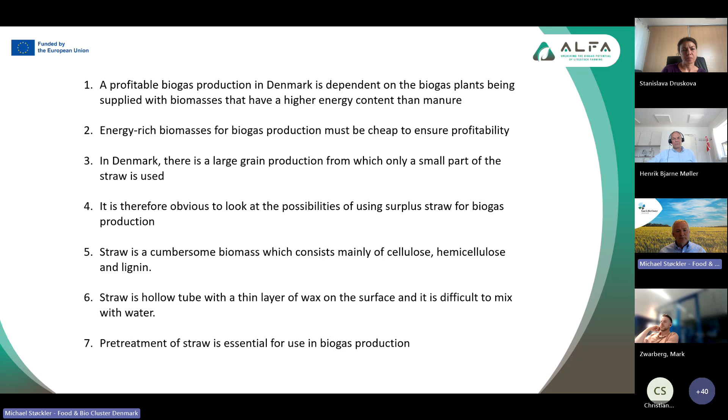Straw is a cumbersome biomass. It contains mainly cellulose, hemicellulose, and lignin. On top of that, the surface is covered with a thin layer of wax, which means it's quite difficult to have it suspended in water. It tends to float, and that's why pre-treatment of straw is essential to use it for biogas production.

Then a wide range of technologies has been tested to find reliable solutions, and that could be pre-treatment, meaning treating the straw before it's put into the primary digester. It could be inline separation of the partly degassed biomass and then injection of the fiber fraction back into the bioreactor, or it could be post-processing of some of the fiber fractions.

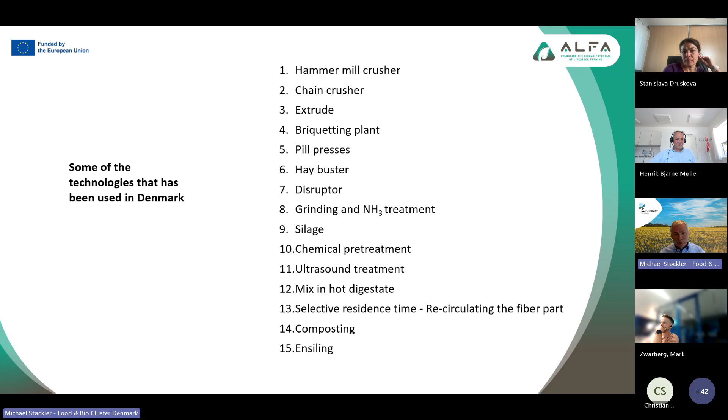Some of the technologies that have been used in Denmark for several years: a long list here with 15 different technologies - hammer mill crusher, chain crusher, extruders, briquettes, pill press, hay busters, disruptors, grinding, silage, chemical pretreatment, ultrasound treatment, mixing in hot digestate, selective residence time, recirculation of the fiber fraction, composting, and ensilage.

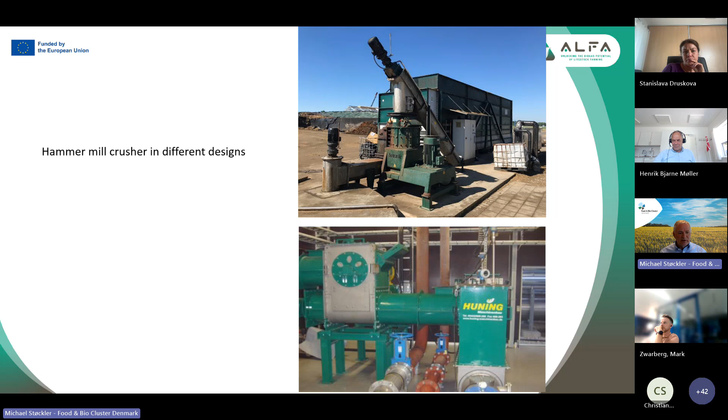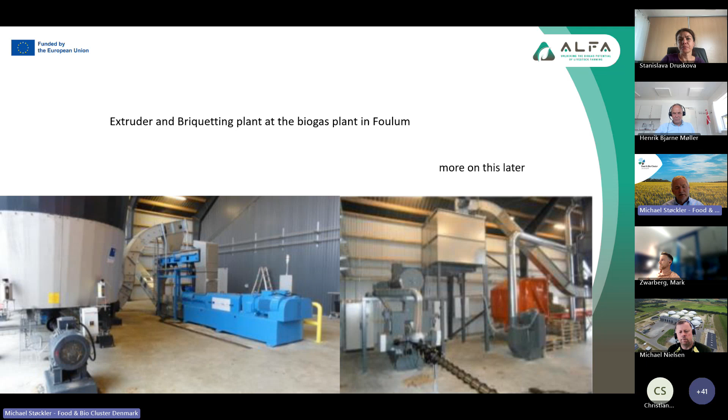Then I'll show some pictures. Take this first: hammer mills have been widely used in different designs and by different manufacturers. Then we have had some extruders and briquetting machines, especially at the plant where Henrik is, which has tested a lot of these machineries. More of this will come later on.

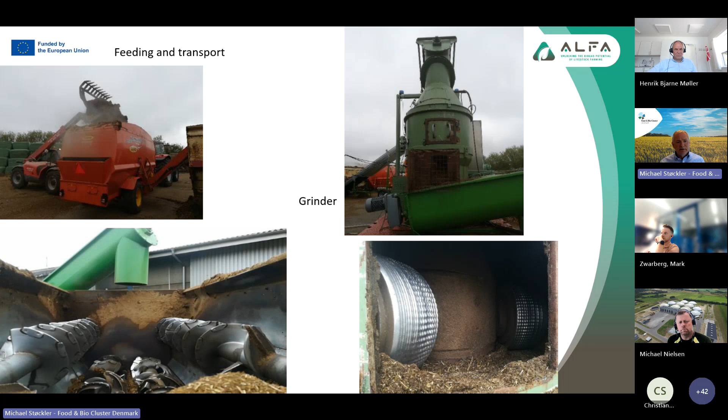We have had special transport equipment. We have had a grinder machine crushing and pressing the straw into pellets.

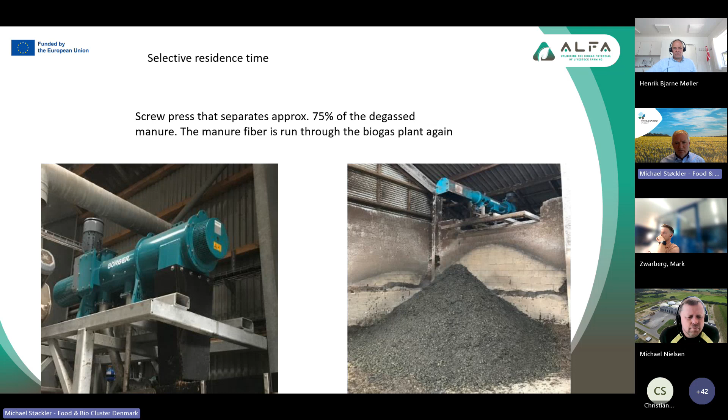We have also had this concept of selective residence time, where you separate part of the biomass from the digester and recirculate the fiber fraction back to the biogas plant for further degassing or decomposing of the fiber fraction, meaning you separate the residence time for different parts of the manure.

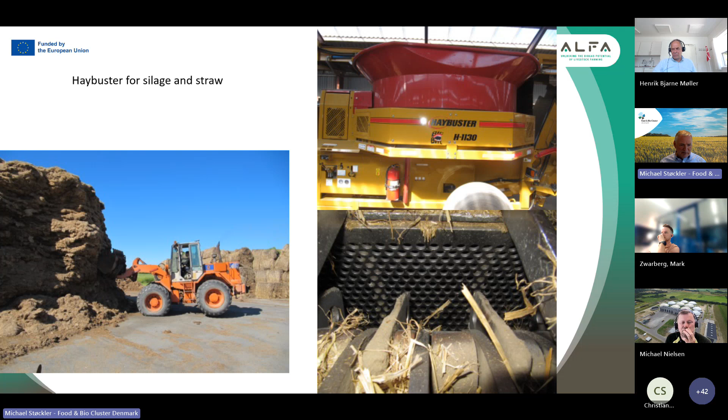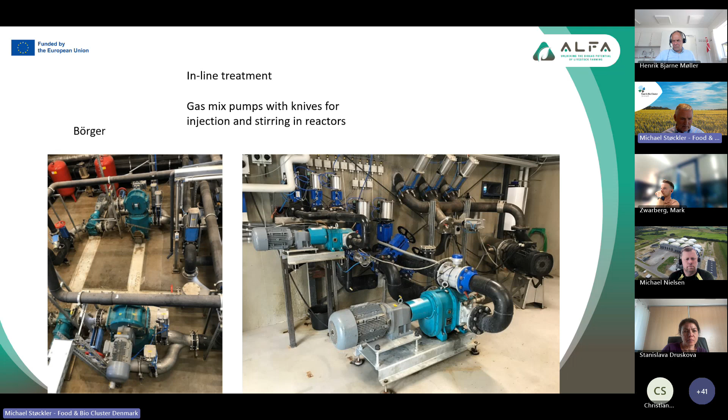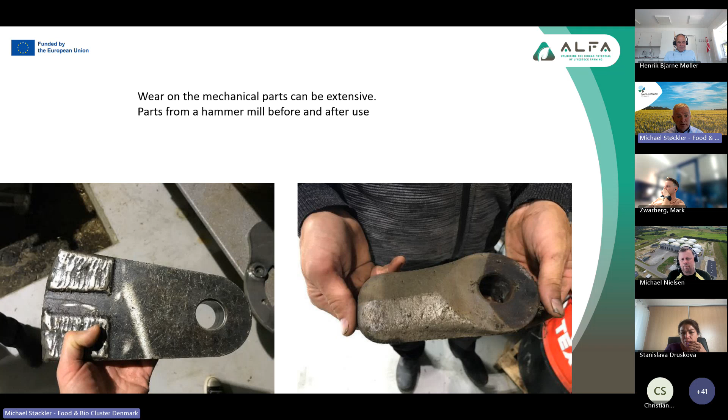But all these mechanical devices suffer from mechanical wear. It's very hard material, and these two pictures show - on the left side one of the hammers from a hammer mill, and on the right side the same hammer after it's been used for a while. So you see the wear of these iron parts is very heavy.

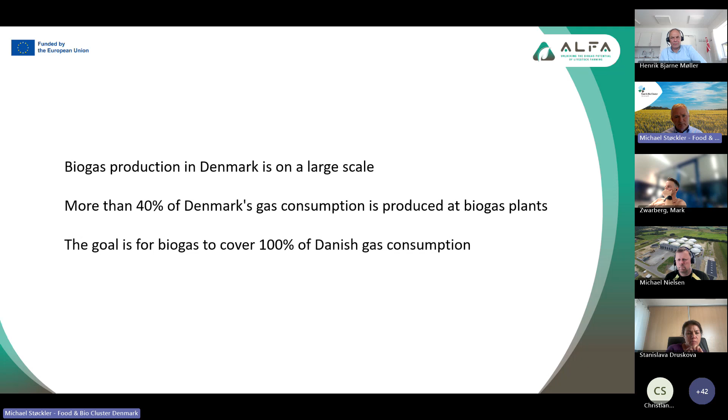Biogas production in Denmark is on a large scale compared to most other places. More than 40% of Danish gas consumption comes from biogas plants. The goal is to have the ability to produce 100% of Danish gas consumption, and that's the end goal for the biogas sector in Denmark.

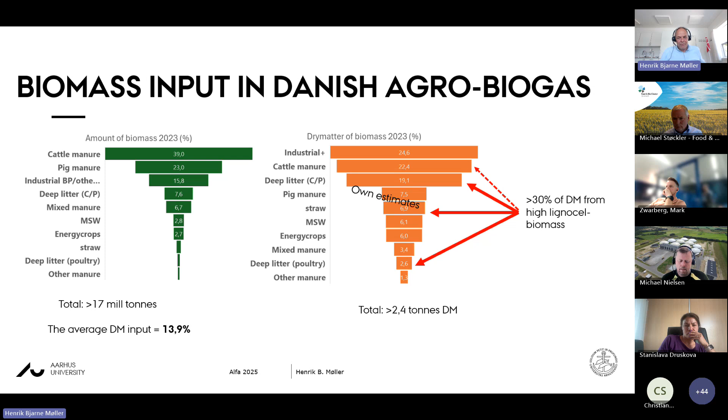When we look at the biogas plants treating straw in Denmark, a lot of plants have some amount of straw treatment. Probably around 40 of the 100 plants today treat some amount of straw, but a lot of them treat very low amounts, less than 10,000 tons per year. Only a few plants are in the high league of treating straw, with up to 40,000 tons. So it's still a rather small amount of straw, even for the biggest plants.

So how much straw do we actually have available for the biogas plants? We have around 6 million tons, almost 6 million tons of straw in total, whereas most is from cereal and a little from rapeseed straw. And today we use it mainly for incineration, feed, and litter.

But this means that there's still a lot of available straw in Denmark. More than 2 million tons of straw is available for biogas. Probably not all of it would be available in practice, but there will be quite some.

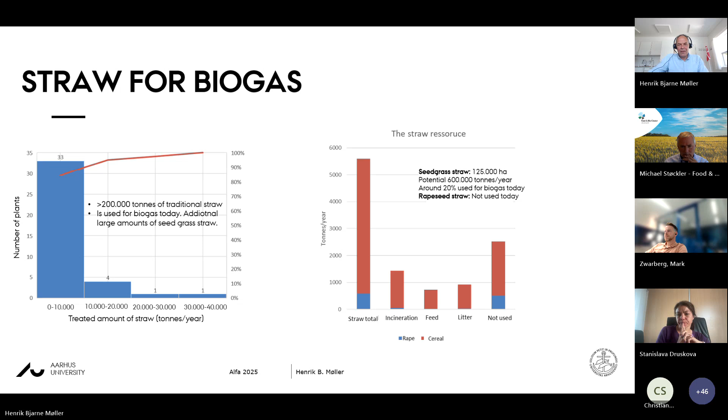Then when we look at straw, how much energy do we actually get out from it? That can be calculated in a lot of different ways. If we know the chemical composition, we can find out that from an average straw, we are somewhere between 450 and 600 liters of methane per kilo volatile solid.

We can also put it in a bomb calorimeter and measure the energy content by incineration. And here we reach about 550 liters methane per kilo volatile solid.

So we have a really high potential, but in real life it is bacteria who's doing the conversion. And when we have done a lot of experiments in batch assays, we are in the range between 210 and 300 liters methane per kilo volatile solid. And you can see here the big variation in different experiments.

So straw is highly variable in how much gas we can get, but in all cases we are only around 60% of the potential. So there's a huge potential if we could increase this amount.

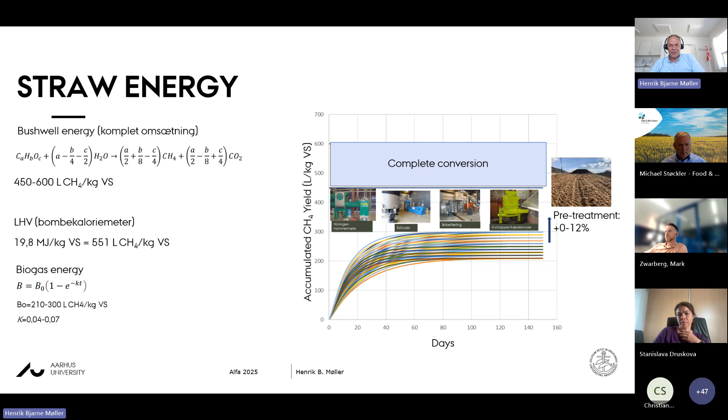And Michael very well described all the technologies that have been used until now, and here we can get somewhere up to 12% extra gas from the straw by, for example, briquetting or extruding or hammer milling and so on. But still, in the pretreatment, there is a high potential that cannot be used today.

The way the straw in Denmark is used today is variable. We have a very big amount of straw now going via deep litter into the biogas sector, and a lot of biogas plants treat this deep litter. Then we have low quality straw.

This is used to a high extent by different actors, and here ensiling and maceration are the main treatments used, and a few plants have more than 10% straw in the biogas mix. That's around 2 plants in Denmark have more than 10% straw.

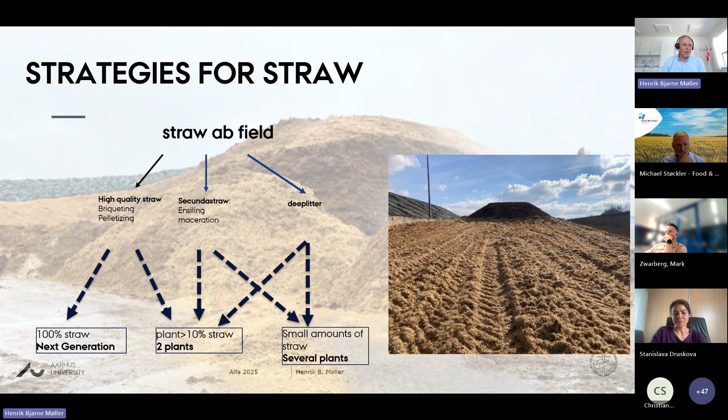Then we have the high quality straw, and it can of course also be used for ensiling and so on, but also it can be used for briquetting and pelletizing and other technologies with dry straw. And there I'll tell a little about the new types of biogas plants that we also have some cooperation with companies to test, where we use 100% straw.

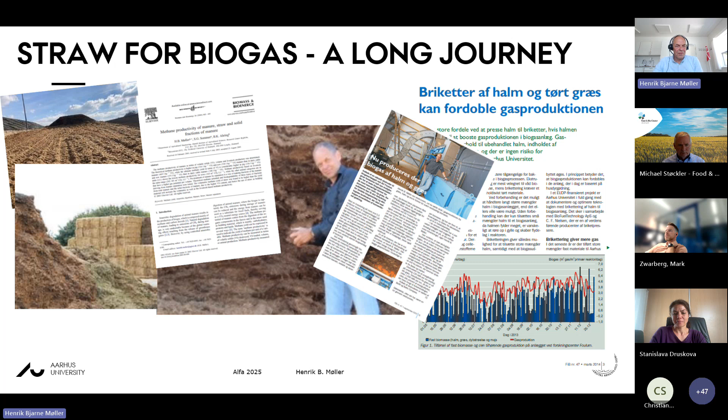But it has been a long journey to reach where we are today. More than 20 years have gone since the first initiative was there, and today it's still, as you saw on the figures, quite a limited amount of the potential that we are using. But to reach the ambitious goal of being completely fossil-free and natural gas-free, straw is the most important biomass to get into the sector.

Then I'll try to highlight a few examples on how to treat straw. We have had a project for several years where we are looking at baling and ensiling.

And the good thing about ensiling is that we can use low quality straw. We can even take the straw directly from the field before it's dry. So in the very busy periods of autumn, where the farmers need to seed new crops, it can be a way to get it away from the fields very, very fast.

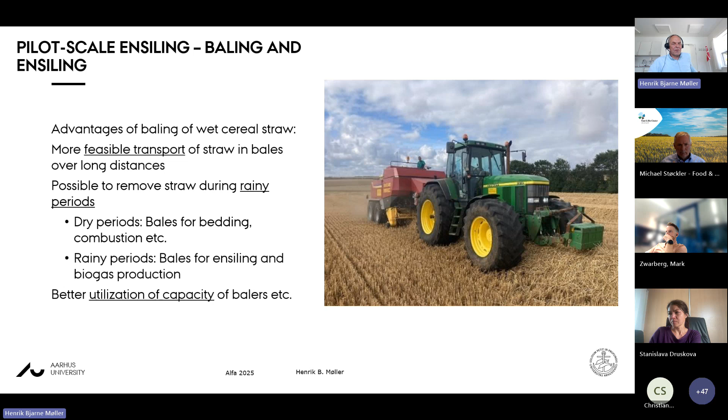And if the biogas plants accept this rather wet straw, there can probably also be a discount for the biogas sector to buy it at a lower quality.

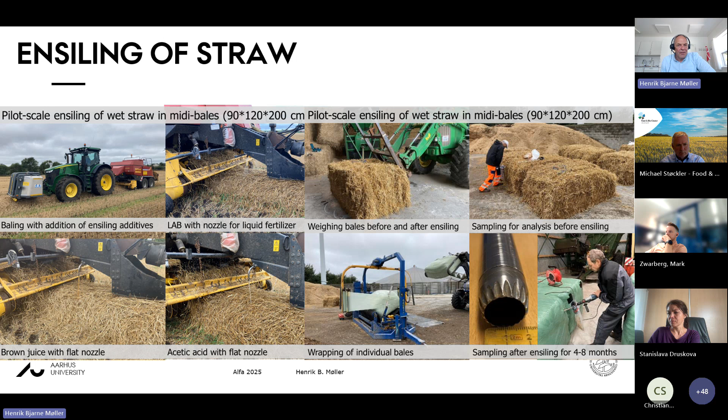During the last year, we have done a lot of experiments with this straw silage, where we have used a lot of different additives and so on. We have added the additives directly in the field, where we have sprayed different additives directly on the straw before baling. Things like acetic acid and enzymes and so on, to reach a higher gas yield.

So this is some of the straw types and so on we have looked at, and some of the additives. And the conclusion is that all these kinds of additives, that we used a lot of effort testing, only have a minor impact.

So what really means something to increase the yield of straw by the silage process is the water content. If we go up in water content, we can get around up to 19% extra gas compared to dry straw.

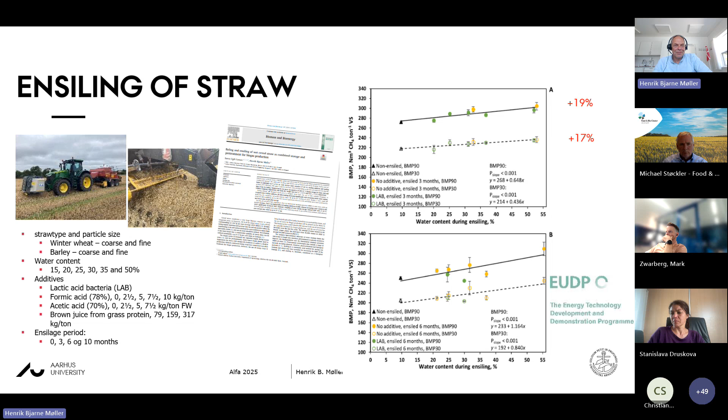That's actually quite promising, but a little surprising that all these additives didn't have a real impact. The reason we get this higher yield by ensiling is the pH decrease during the silage process. As you can see, if we have around 30% water in straw, we can get a proper silage process without any additives.

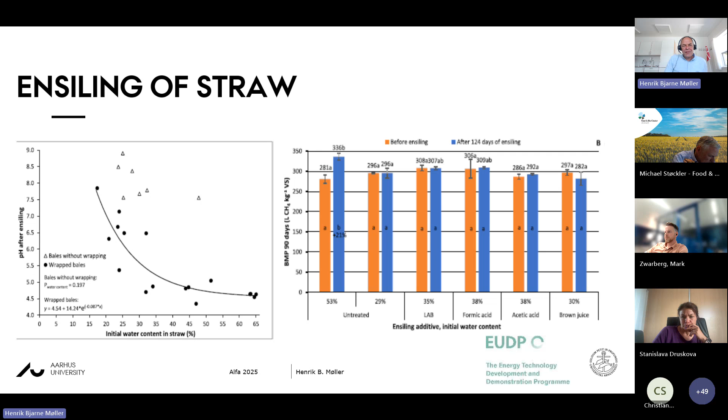We don't need to have any easy degradable sugar or anything, it will happen by itself. As you can see here with the different additives, they don't really have an impact. It is the water content that really matters.

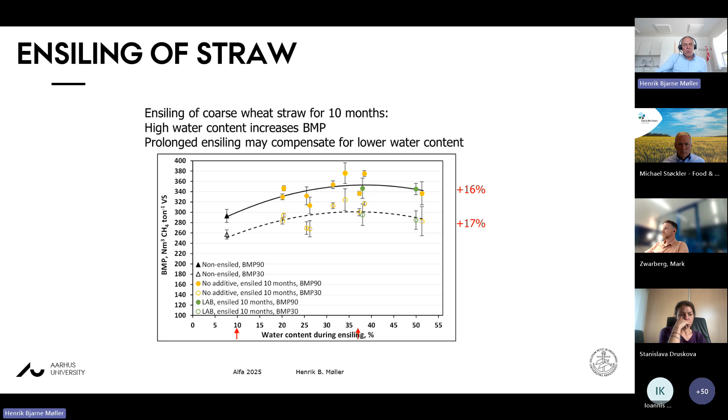Again here you can see wheat straw that has been ensiled for 10 months. It seems there's a positive impact up to around 35% water. Around 40% water, then we have a very good silage process. Going above 40% water, it doesn't seem to have any impact.

As I told you, we also have this new project here with pure straw, where we're also working with temperature. Traditionally, we have mainly worked with mesophilic or thermophilic processes. But we also have microorganisms that actually work even faster than thermophilic if we can increase it to end of 60s, like around 70 degrees.

Something is happening with straw when we go to higher temperature, and we have seen examples of up to 40% in some cases extra gas. This is an example of the setup that we are testing now in Foulum together with Biofuel Technology and Aalborg University in an EUDP project.

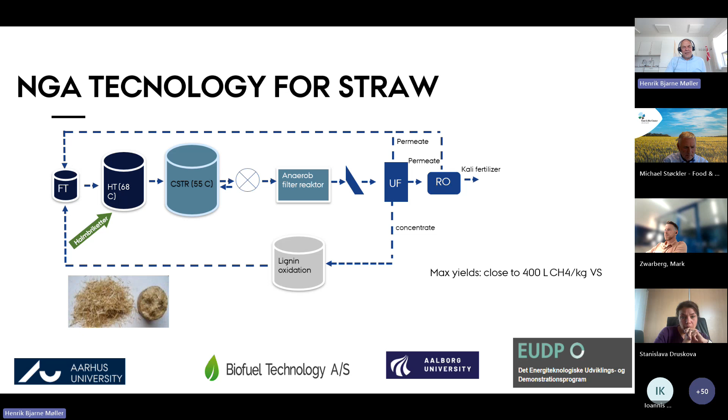We have seen some, in periods, very promising results with around 400 liters of methane per kilo volatile solid in some periods. So it seems that there's something here that really can boost the amount of gas we can get out of straw. There's not time to really go into detail with this, but it is a process where we have a pre-process at 68 degrees and then a normal thermophilic process, with some filtration on the backside and so on, and ideally some lignin oxidation in the future.

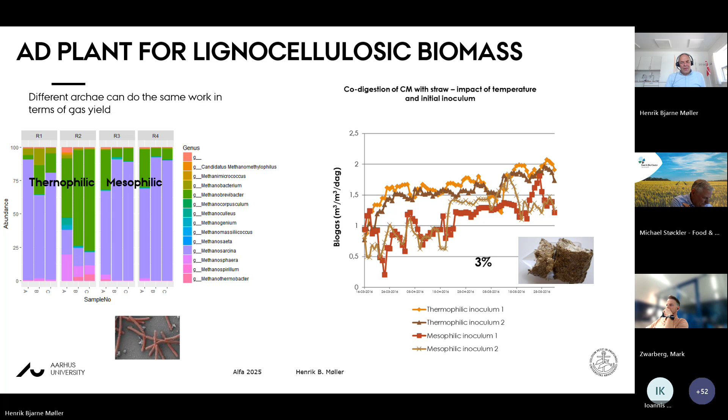Time is running quite fast. Also, one thing that is the Achilles heel of using straw - we think we have solved a lot of problems, but one problem when we look at sustainability is that from 2016 to 2025, we have increased the dry matter from around 5.5% in our digesters to 8.5% on average.

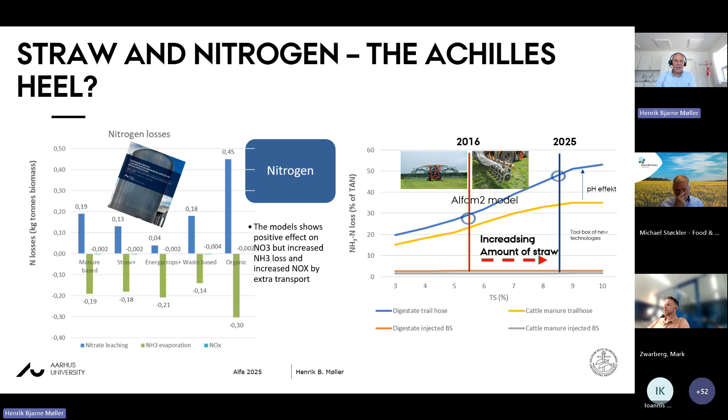We have developed this at AU, this ALFAM2 model, which indicates how much ammonia emissions we will have in the field. This blue one here is digestate, and as you can see, if we go from 5.5% dry matter to 8.5% dry matter, we will go from around 30% ammonia emission to 50% ammonia emissions of the total ammonia we have in the digestate. So it's a tremendous challenge we have here. The yellow one here is cattle manure, and you can see with the same dry matter, but here because of the higher pH combined with the high dry matter, we have a real issue here.

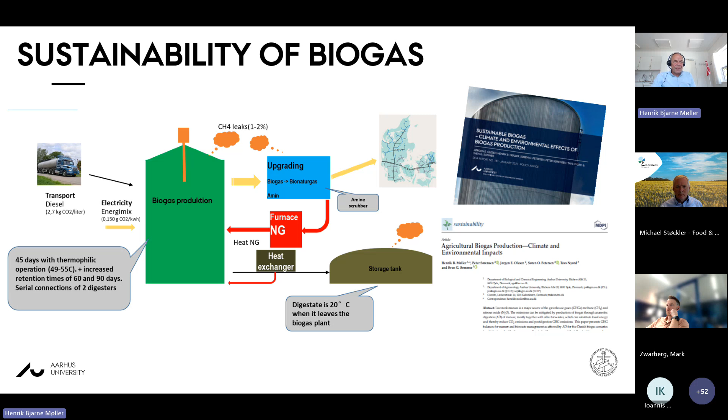Looking at sustainability, we have some challenges here. We have done a sustainability analysis of different biomasses going into biogas plants, published scientifically and also in a report from Aarhus University not long ago. There's not time to go into details, so you can read the reports and scientific publications yourself. The main thing is we looked at 5 different biomass compositions.

We have a quite manure-based system and a very straw-based system, and we looked at kilo CO2 equivalents per ton. On the positive side, we have the gas to the grid, which counts most. Besides that, we also have reduced methane during storage, especially from manure-based plants. But with straw-based plants, we have a much higher energy yield per ton of material, so we have very good sustainability with straw.

I also did a calculation with next generation straw, where we only use straw, which has a really high CO2 impact because of the very high energy density in the straw. If we take CCS, carbon capture storage, into account, we can really have a high CO2 impact, especially for straw, where quite a high amount of the carbon is converted to CO2. We have only around 50% methane from straw conversion, so we have a very high additional effect of carbon capture storage.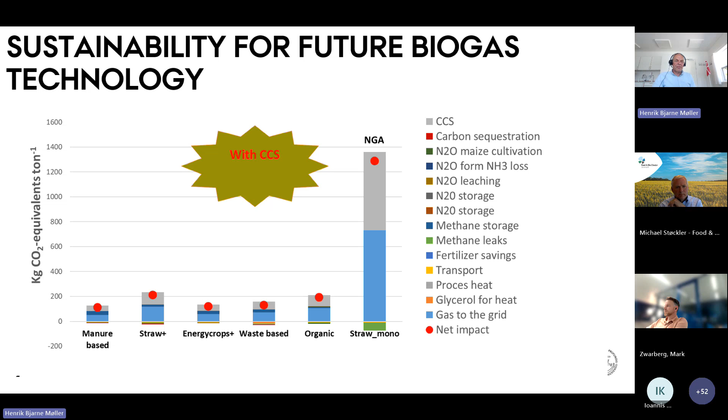I'll come to the conclusion now and say that straw plays an extremely important role for the further development of the Danish biogas sector. Today, if we include the deep litter, around 20% of the gas yield already comes from straw and straw-rich products in the Danish biogas sector, and that is going to increase dramatically if we have to reach the national goal.

There's a huge potential to increase the yield from straw, where we only today get around 50 to 60% of the yield. Also, these new generation straw plants with monodigestion and a very high amount of straw can achieve a very high greenhouse gas reduction. We have some challenges with the fertilizer products which we need to solve.

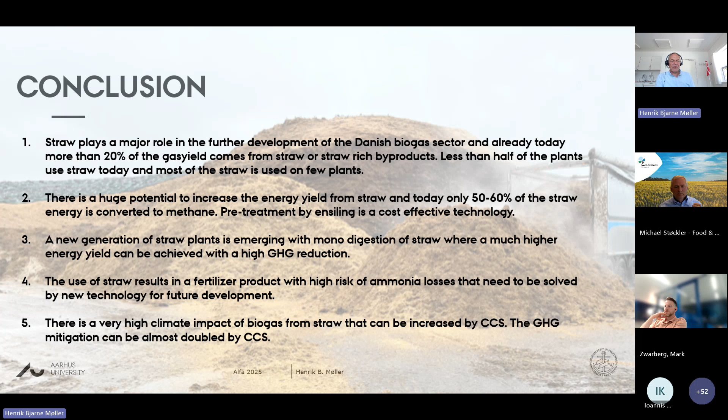And also for straw, it's important that we are able to include the CCS value because of this very high amount of CO2 we have from the biogas from the straw also. So I will end my presentation here, and thanks for your attention.

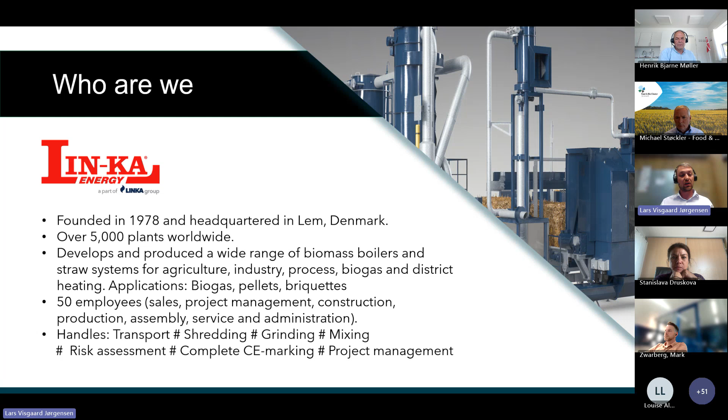First of all, I will talk a little about Linka. We are founded in 1978, and our headquarters is in Lem in Denmark. Worldwide, we have around 5,000 plants. Our first and main focus was making combustion plants for district heating and for industries, farmers, and so on. It has been our focus to burn straw, but now our main focus with straw is putting it into the biogas sector instead. We are 50 employees today in Lem.

Then the next step is our conveyor belt, which moves the straw bales to our shredder. Before it reaches the shredder, we take all the strings off. The strings are placed in a container beside the string remover, and then it's moved to the shredder. The shredder just takes the bales apart.

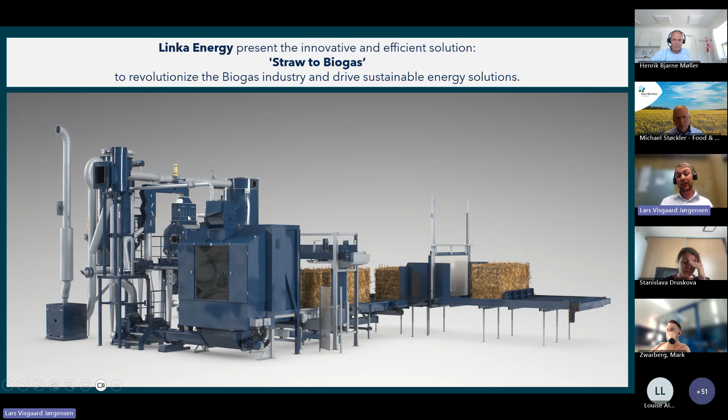The first mill is treating the straw before it's transported with vacuum to our main mill. That means the first mill here is treating it into 25 to 50 millimeters, and our main mill here is treating it to 2.5 millimeters in length.

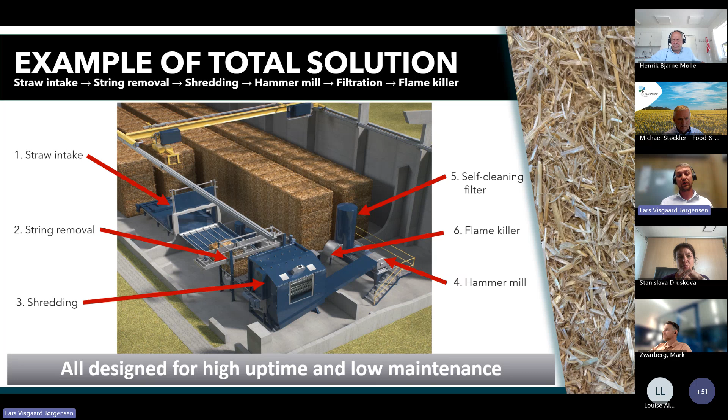We are also doing cases where we only have one hammer mill. If the retention time into the digesters is long enough, then it's enough only to treat it down to 25 millimeters, but I will tell you more about that later.

In the project phase, we are doing process diagrams and components lists for all of our projects to make sure that everything is aligned with the electricians and in your project phase also.

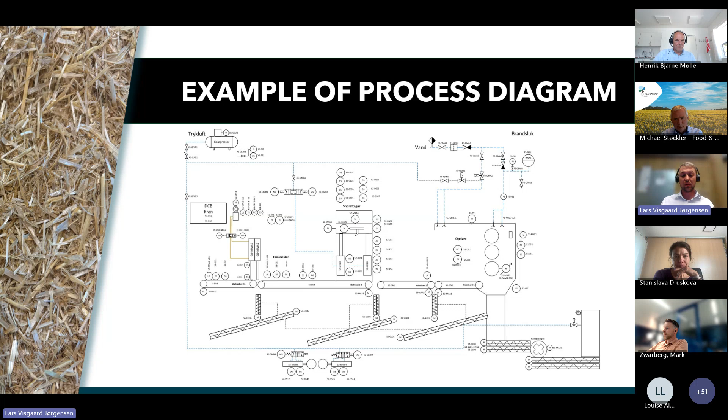On all of our systems, we are putting a spark extinguishing and firefighting system from GreCon. This makes sure that if there should be a fire or ignition into our systems, it's immediately stopped with some sensors and spray nozzles into our auger systems, under the belt, or under the mill. This is an approved system from German insurance companies.

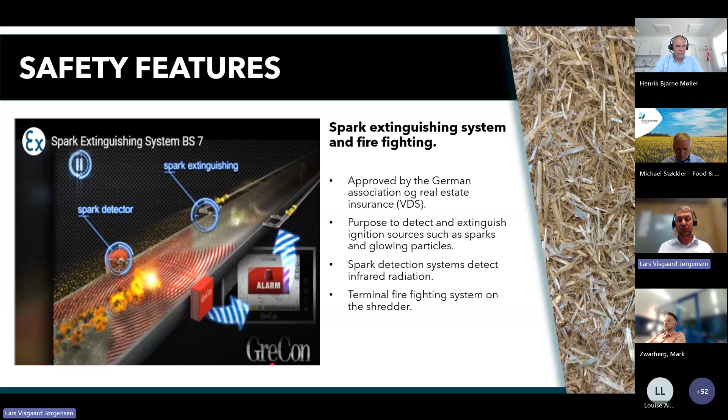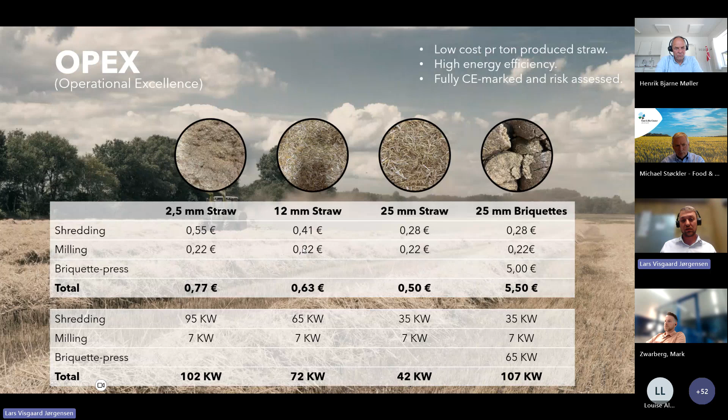Let's take the next slide, if I can do that here. And then I will talk a little about the gas yield into the straw.

Henrik was also talking a little about it before, but the retention time into the digesters is important when we are talking about using straw into the digesters. In our point of view, the best case is to have around 55 to 70 or 75 days into the digesters. Let's make sure that we have enough time to get most of the gas out of the straw before it's leaving.

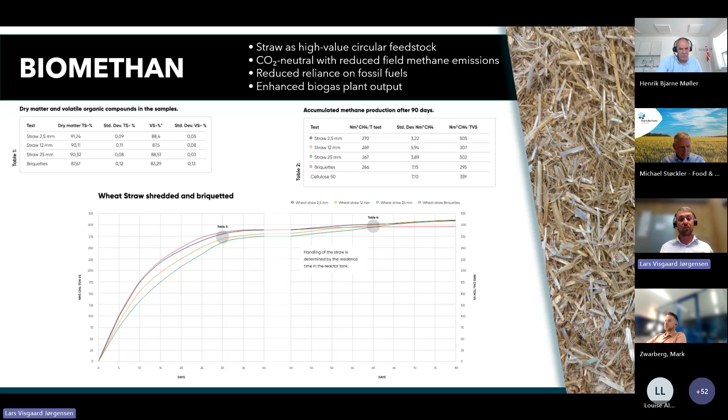In some of our cases, we are using recirculated straw mixed with recirculated manure to mix with our straw before it's pumped directly into the digesters.

In our point of view, straw is an important thing to use in the biogas sector. As Henrik also was talking about, there is a lot of energy in the straw, and it's not collected in many countries. We are good in Denmark at collecting straw, but in the southern part of Europe, there is a lot of straw available just to make energy.

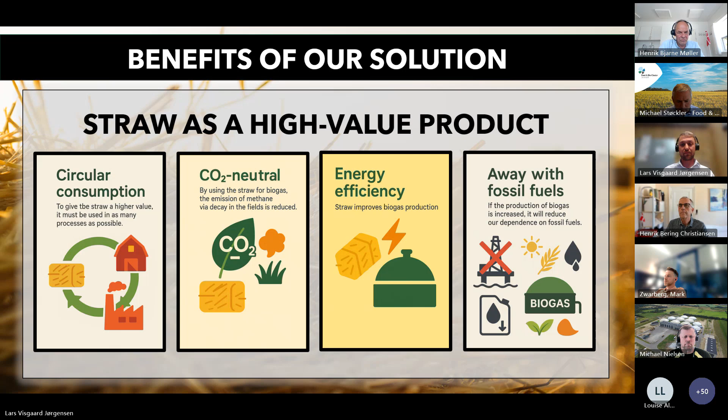It was short but good. I think it held my time. That was all from me.

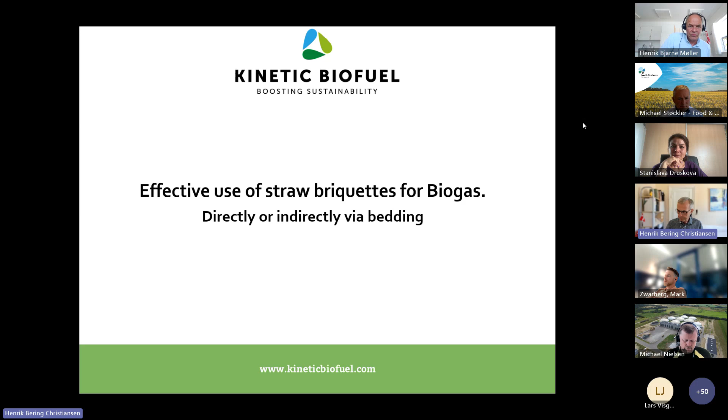Henrik Christiansen is my name. I'm from the company Kinetic Biofuel. I'm going to speak about straw briquettes for biogas, either directly or indirectly via bedding. So let's jump into this right away to keep the time.

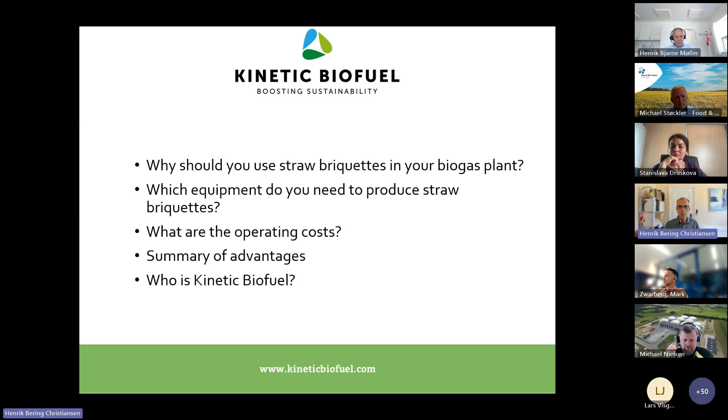Why should you use straw? I mean, it's already been told what equipment is needed. We already seen something from Lars from Linka. What are the operating costs? Lars was helpful in sharing that as well. And then some advantages and who is Kinetic Biofuel.

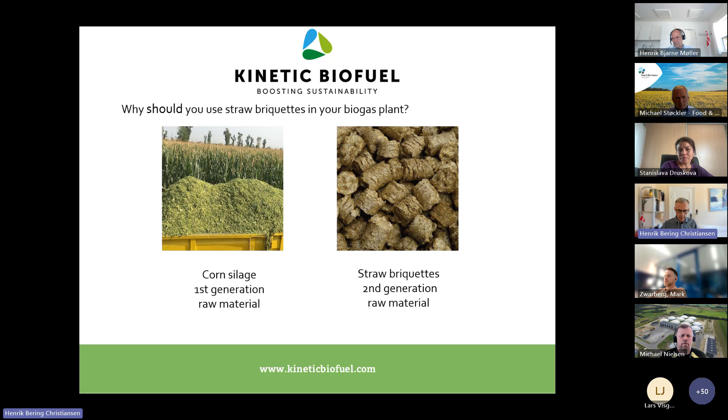Why should you use straw? I mean, it's obvious for all of us that first generation raw material like maize or corn shouldn't be used for biogas. Straw with a high dry matter is a perfect raw material. And in most places, you are restricted in how much first generation you can use. So the right way is, of course, to go for straw.

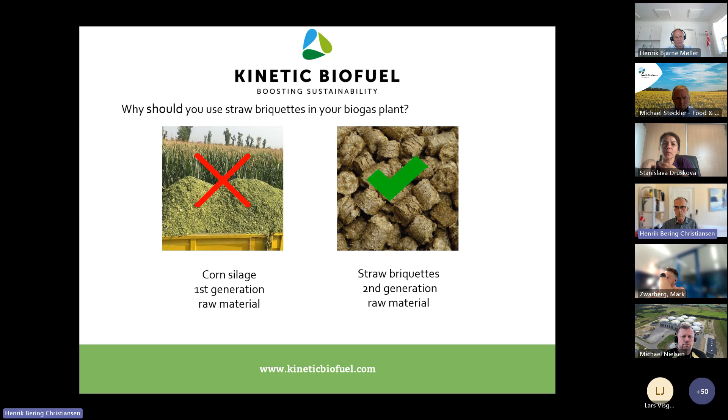You see the dark red ones here where there is straw available. In Denmark, we are fighting a little bit at the moment on prices for straw. There were 2 years of bad harvest, which made the prices go up and hasn't been that helpful for the industry.

How is it that straw can't be used? We already heard there was wax on the outside. Here's a picture of a straw - you see all of the whole pore cells with air trapped in it. After briquetting, all of this air is gone. And what you have here is a piece after briquetting, and now water is added to it. When water reaches the straw, it absorbs the water, so the straw goes from hydrophobic to hydrophilic.

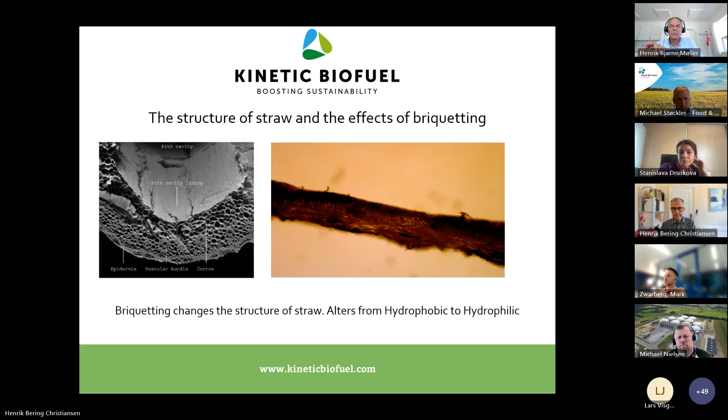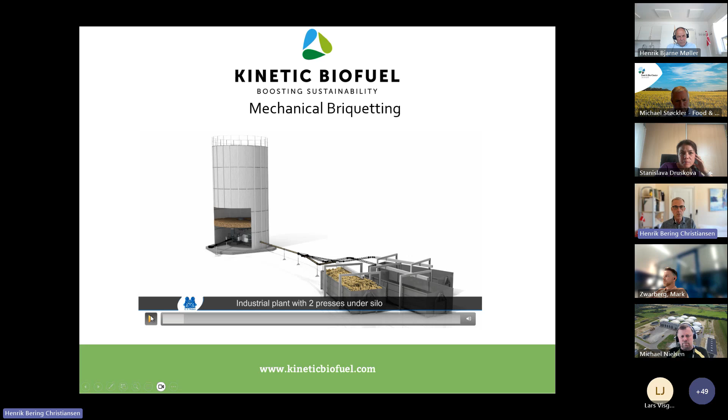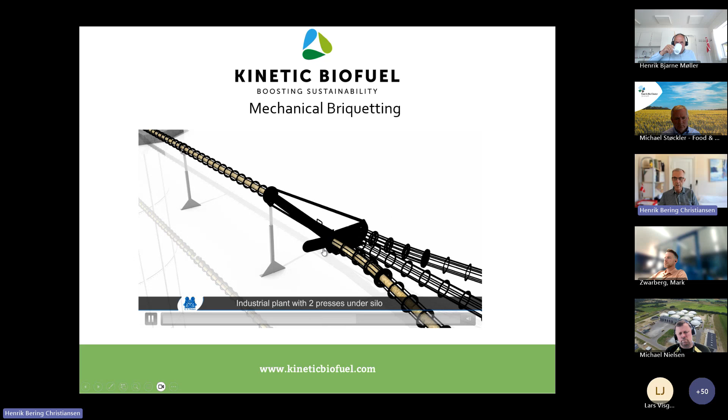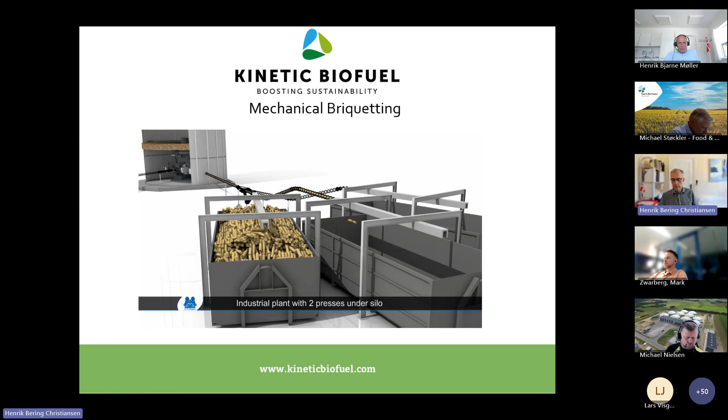Here we have a briquette press in operation, shown in a silo - this isn't the normal way if it's with straw, but here you see the material coming down. If it was straw, shortened straw would come down and be fed in front of the piston moving forth and back, and then a long endless briquette is formed. This briquette is transported in the cooling line, in this case to an open container. Then this open container could be taken to one or another biogas plant, or instead of the container, you could send it directly to the biogas plant reactor.

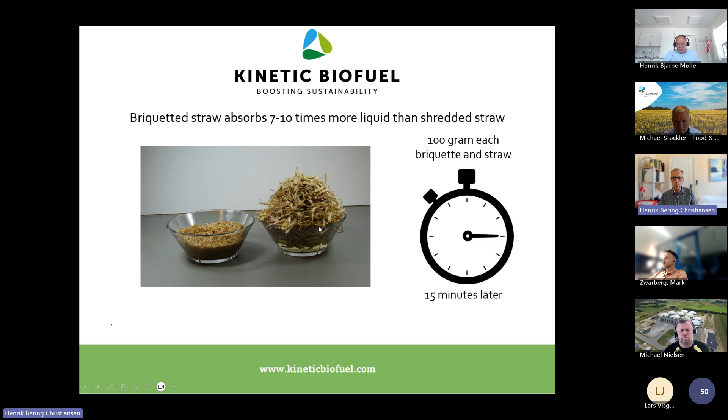What happens now when you have the briquette, where you've broken the structure, and you put that into water? Here you have a small piece of briquette, 100 grams. Here you have shredded straw - not the 2 millimeter or 2.5 millimeter that Lars was speaking about, but longer. After 10-15 minutes, this briquette has absorbed the moisture. The straw here is still floating, and you have the floating layer that has been one of the major issues for straw in biogas plants.

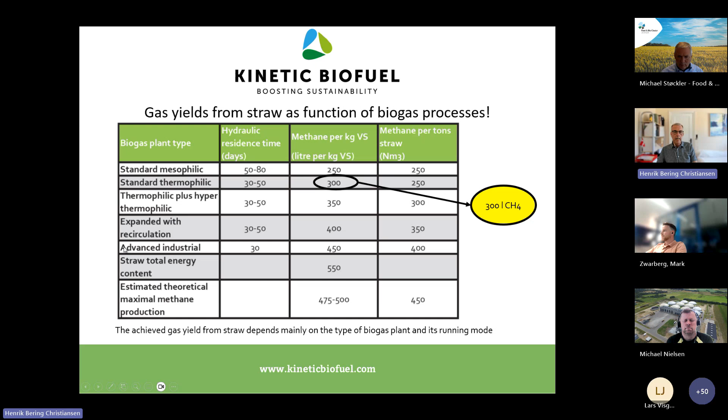Then these figures - I'm sure a lot of these figures were done with the help of Henrik. Here we have the different types, mesophilic, thermophilic, and what we'd normally say thermophilic would give you 300 liters of methane per kilo. But as written here, the gas yield will depend mainly on what type of biogas plant it is and how it's been running. Henrik was telling this as well, that they were doing trials at Foulum Aarhus University now, and Torben Bunde, part owner of Kinetic Biofuel, working in this advanced industrial setting, is getting those very high figures that Henrik had in his presentation.

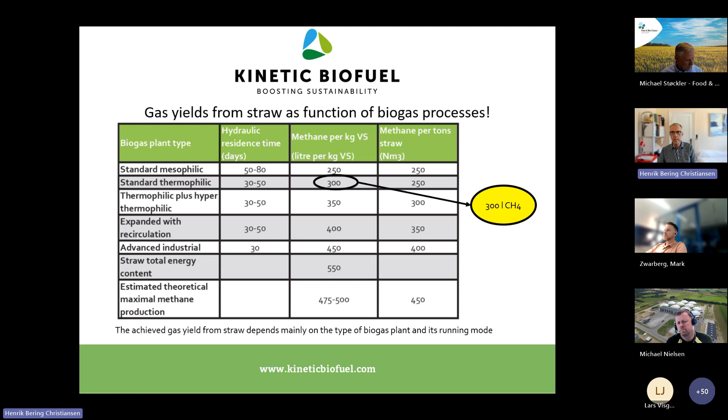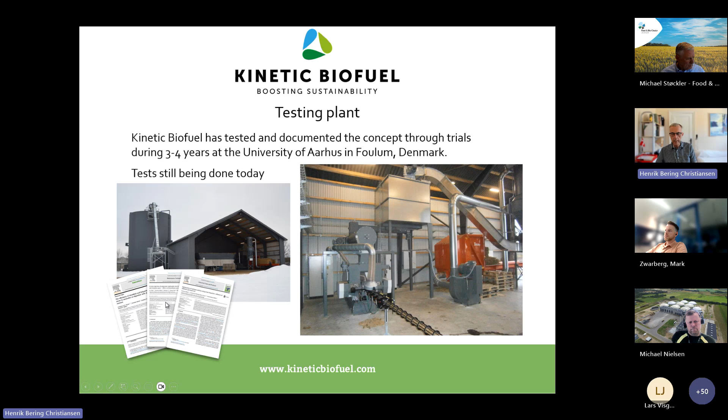Here I've shown some scientific reports done at Aarhus University. I'm 100% sure that Henrik's name would be on each and every one of those.

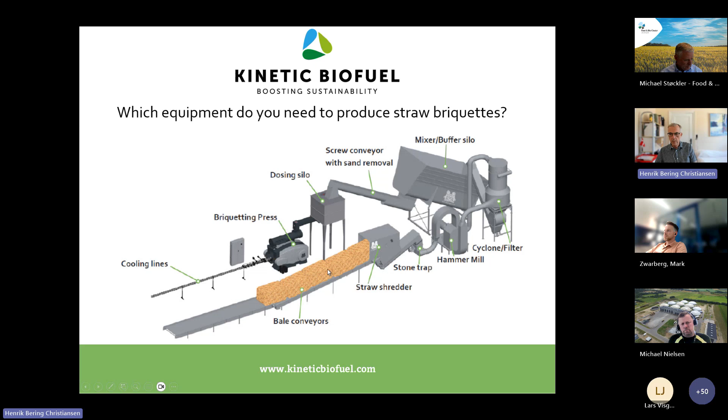What is then needed to make briquettes? Quite similar to what Lars was showing - you have a bale conveyor, you have one that takes the bale apart, you have a hammer mill, you have some transportation by air, and then the difference from his system is that we put the briquette press at the end of the straw preparation line. The straw needed here is good quality, dry straw - not secunda straw or anything like that.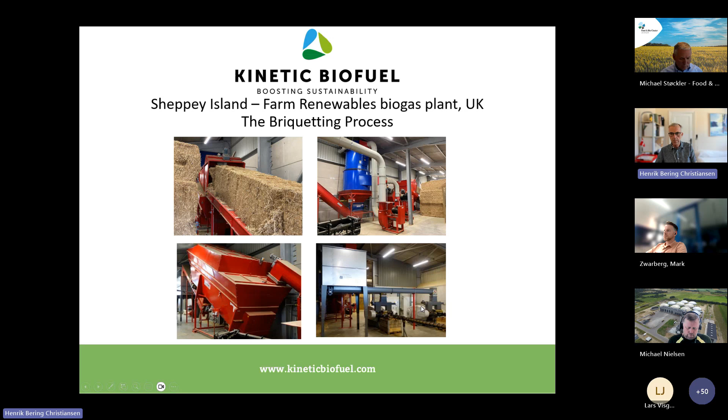Here we see some pictures from a line in UK. Here you have the straw bales coming up, taken apart. You have the hammer mill here, you have a mixer, and then from the mixer, in this case, into one of two briquette presses. The briquettes will just fall on the floor, and then be taken with vehicles to the feed box. You see this picture where the briquettes are here in the corner, and here you see cow dung, then fed into the reactor.

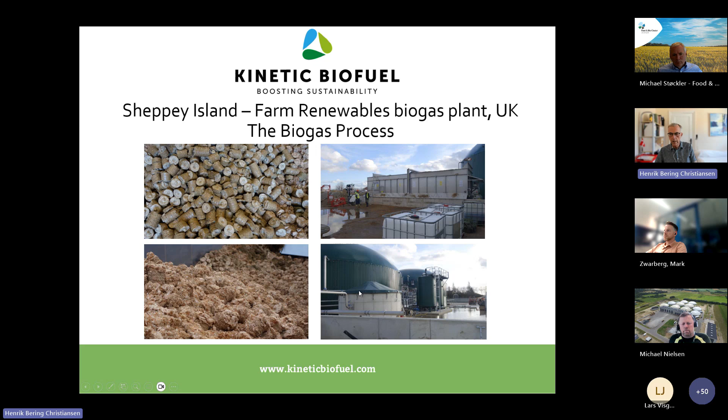What are the costs? Lars showed some of his costs.

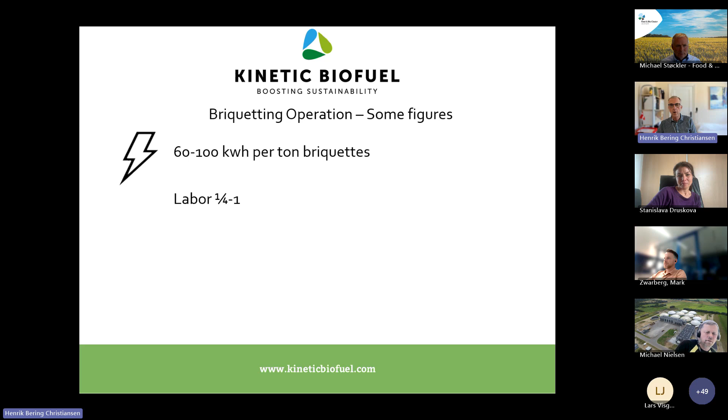Now, my figures are slightly lower than his. I say it's 60 to 100 kilowatt hours per ton of briquettes manufactured. 60 kilowatt hours per ton is for the briquette press, and when you have the briquetting or straw preparation line, then it's 100 kilowatt hours needed per ton. Labor, we say it's a quarter of a person to one person per shift.

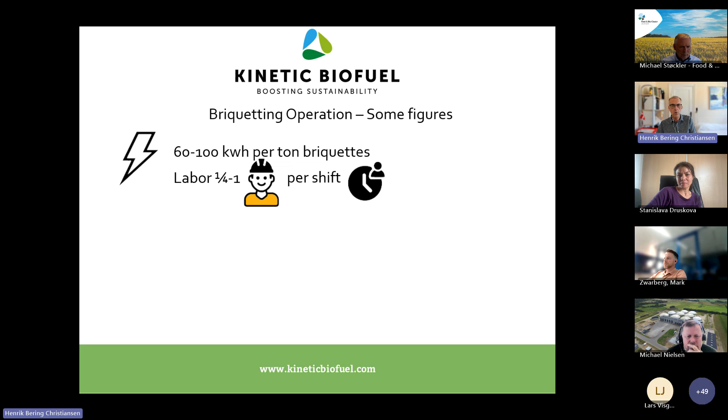There's a string remover on the line, so less people are needed. If there's a crane, as Lars mentioned, then of course way less - it fully depends on how automated you make the solution. Cost of service and maintenance is an open question, but will depend on quality of straw. We say it's 5 to 7 euros per ton produced - that's the cost.

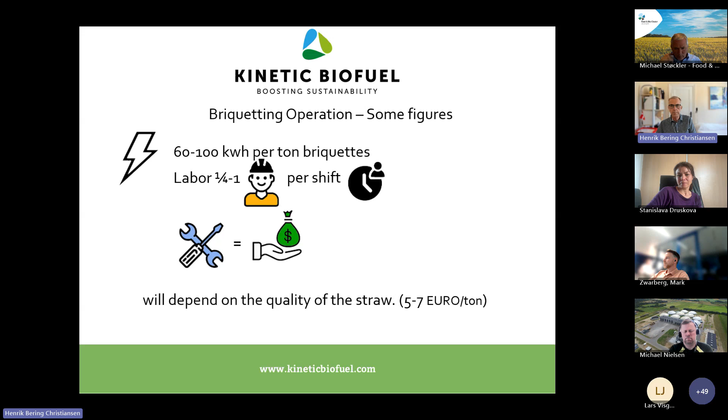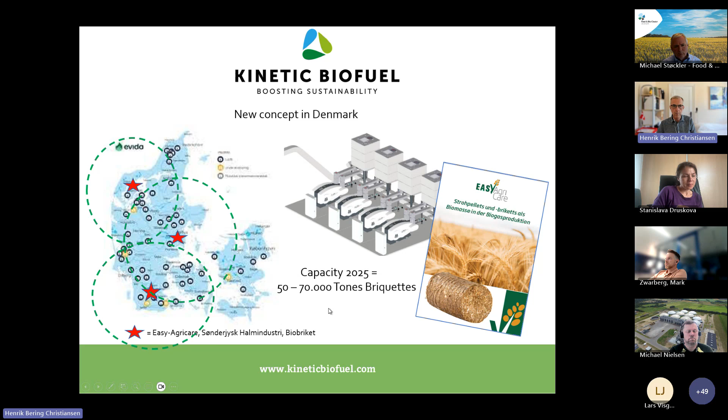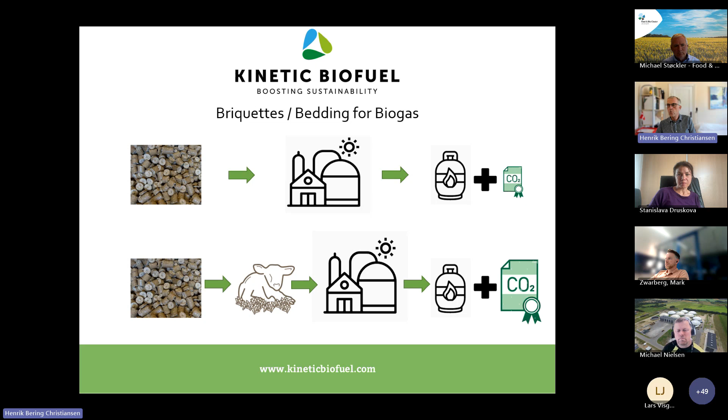But what you get with this, and what makes the business much more feasible now, is that you get a higher CO2 certificate than if you used it directly.

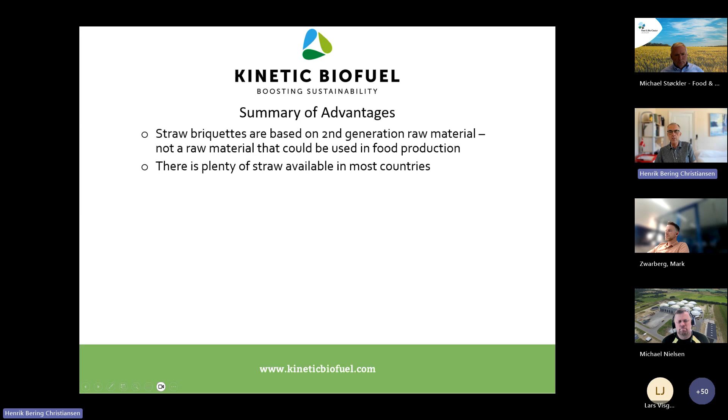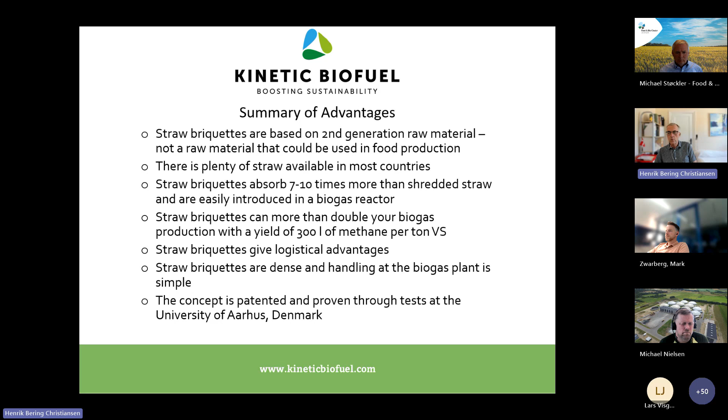The advantages: second generation raw material, plenty of straw available in most countries. Straw will absorb, briquettes can give you higher yield of gas due to the density, giving you a logistical advantage - you can transport it easily. And the concept is patented and proven through tests at the University of Aarhus.

Who are we? Kinetic Biofuel - we are a company with two owners. One owner is CF Nielsen, who has manufactured briquette presses for the last 60 years. The other is Biofuel Technology with Torben Bunde, and they are the ones in these trials with 100% straw-based biogas plants out in Foulum.

So this was what I had. If you have questions, put them later or contact us later - you're most welcome.